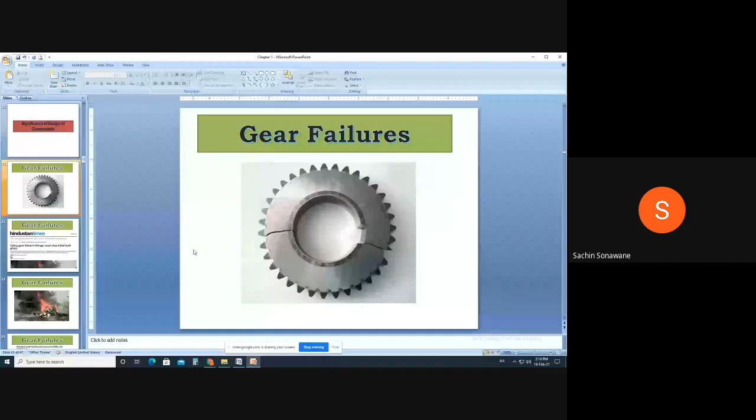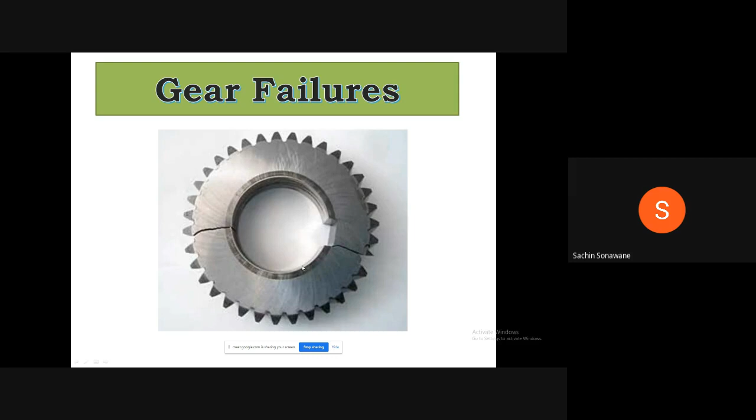There may be different causes of this gear failure. There may be improper material distribution, or improper material selection, or the thickness of the gear provided may be less as compared to the standard one. Therefore, these are the different causes of gear failure.

Now next, this is the article which was published in Hindustan Times. The title of the article is Safety Gear Failed in Mirage Crash that Killed Both Pilots. You are knowing that aeroplanes are there. These are fighter jets, Mirage, Tejas. These are the fighter aircrafts.

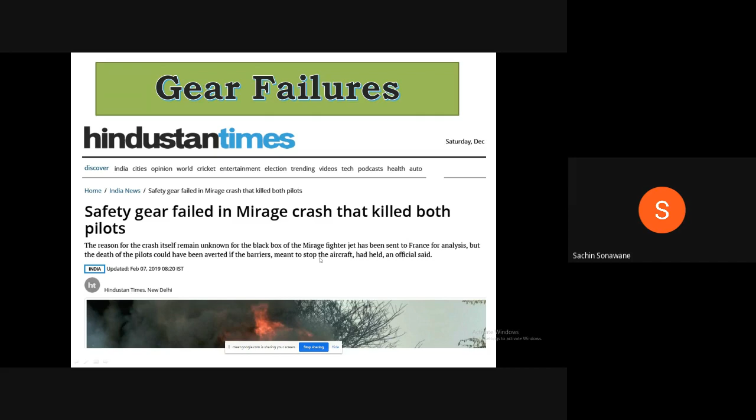Therefore, in these aircrafts, a gearbox is present. Sometimes, if the safety gear fails, the aircraft collapses, and because of that these pilots are also killed, and the aeroplane is also crashed. Therefore, this is nothing but the importance of design. Now you are observing this crashing of a fighter aircraft. Then next,

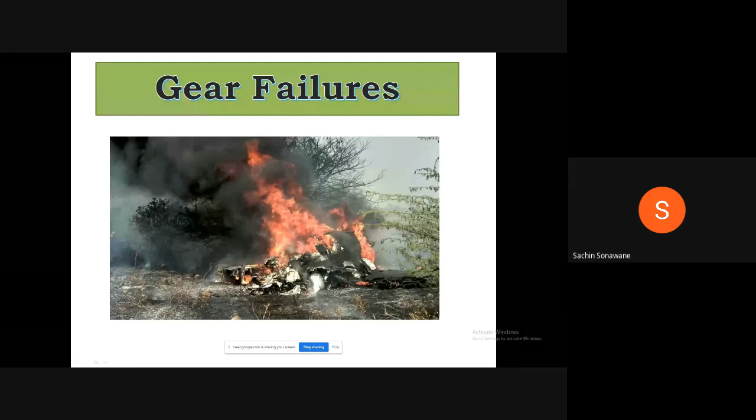gearbox failure caused fatal 2016 crash. Now this article is there because of gear failure. What is going to happen? This article was published in Copenhagen, Denmark. Fatigue fracture of the main rotor of the gearbox caused an Airbus helicopter to crash off Western Norway in 2016, killing all 13 people on board, Norway's Accident Investigation Board said Thursday.

Means because of this failure of the gearbox, the Airbus helicopter crashed, and because of this all 13 people on board lost their lives. Therefore, this is nothing but the importance of design, or significance of proper design.

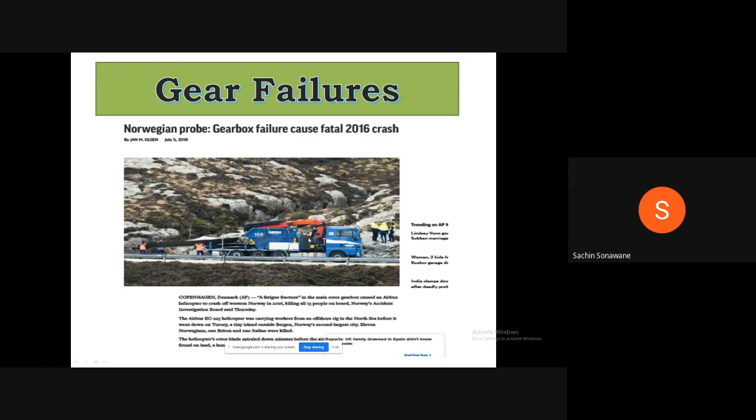Now next, pressure vessel failure. Now, what is meant by a pressure vessel? You are knowing the gas tankers we observe on the road. Gas tanker, petrol tanker, diesel tanker, then milk tanker, water tanker.

Also, while going to Solapur, in Pakni, you are observing that various types of vessels are there. Hindustan Petroleum or Bharat Petroleum, that station is there where petrol and diesel is filled in the tanker. While traveling on the road, you observe very big vessels in Pakni. Those vessels are nothing but pressure vessels. Why is it called a pressure vessel?

Because the fluid, fluid means liquid and gas, is filled in the tanks under pressure. Inside that tank some pressure is there, which may be less or greater than the atmospheric pressure. Since the fluid is filled in the vessel under pressure, that vessel is called a pressure vessel. Now, a boiler is also one type of pressure vessel.

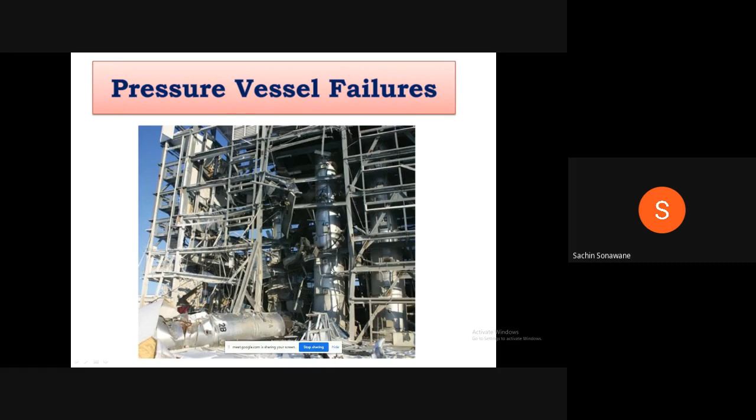You are observing in this figure that there is a failure of the pressure vessel. See, this pressure vessel has failed. There are different causes of pressure vessel failure, same as here, like improper material selection. Also, in a pressure vessel, mainly welding is used to connect different plates or sheet metal to each other. Therefore, if failure of that welding takes place, definitely failure of the pressure vessel will take place.

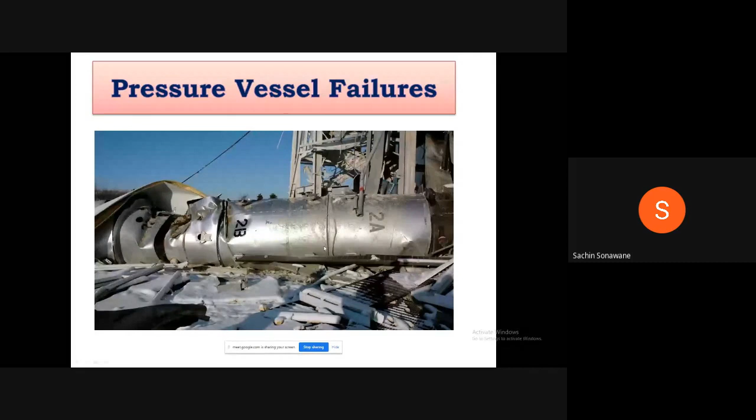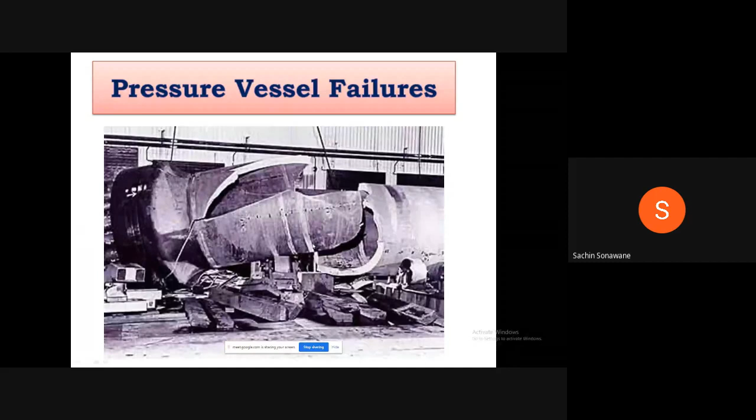See, this is the enlarged view. This is the failure of the pressure vessel. Same case is here. This is the failure of the pressure vessel. Therefore, what is the importance of design? Why is design important? If we design properly, the life of the component will get increased, and we have to take into account safety measures also.

Now, before starting the first chapter, again I will tell, there is one point in machine design which we have studied, that is nothing but factor of safety. Depending upon that factor of safety, the life of the component is either increased or decreased. Now, you may be knowing that you are sitting on the bench, and that bench plywood is having some thickness.

Suppose 10 thickness plywood will be used, and 3 students will sit on the bench. That bench will carry the load of 3 students. If I suppose we decrease the plywood thickness to 5, what will happen? Suppose 3 students of 60 kg each sit, therefore 180 kg total load will be on that plywood, and that plywood will fail.

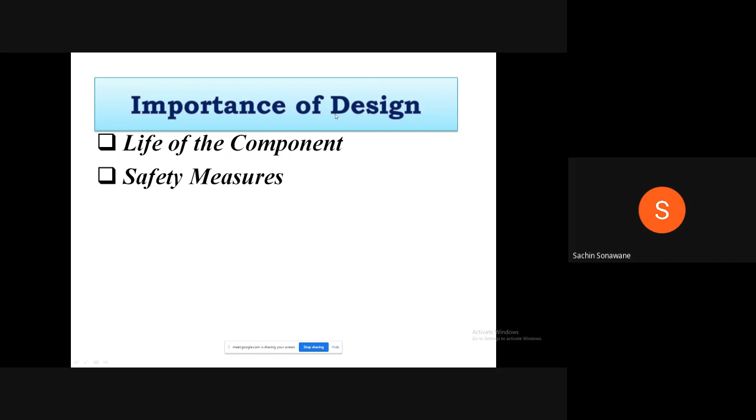Now we will start our chapter number 1, or unit number 1: spur and helical gears. First of all, we will see spur gear. Its contents are design considerations of gears, gear materials, types of gear tooth failures, hunting tooth, gear tooth loads, minimum number of teeth, face width, Lewis equation, Spott's equation, Buckingham's equation, gear design for maximum power transmission, introduction to AGMA code.

And helical gear, virtual number of teeth, force analysis, beam and wear strength, effective load on gear tooth. Therefore, this is the syllabus of the first chapter.

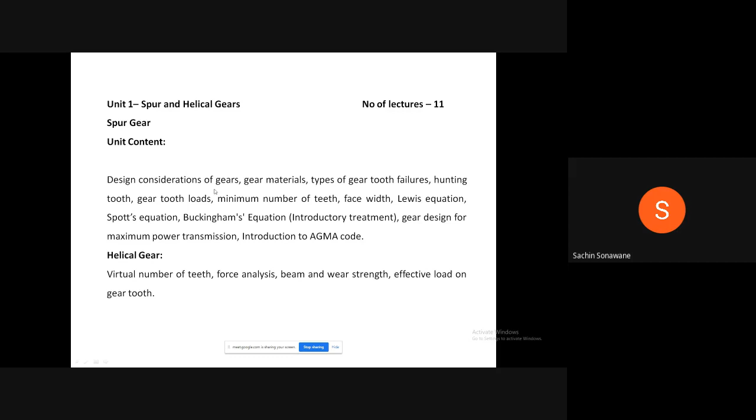Now, I will not directly start with design considerations of gears. First of all, we will see some preliminary theory of gears: what is meant by gear, what are its advantages, limitations, and types of gears. Then we will see some gear terminology, because this is not covered in any chapter or syllabus you have studied so far. Therefore, first I will take some introductory part, and then you will understand the future topics. So, first chapter, spur gear, or first point: spur gear.

Now you are observing these diagrams. This is the spur gear, and this diagram shows two spur gears in mesh externally. Here external contact is there, and that's why we can say that these two gears are meshing externally.

Now, how are you identifying the gear, or what is the definition of gear? Whatever figure you are observing, if anyone sees this figure, he will say that this is the gear. And if a mechanical engineer sees it, he will say this is the spur gear. So how do you identify the gear, or what is its definition? Now, all are saying that gears are used to transmit power. Yes, it is correct, but this is not the definition of gear.

The definition of gear is: if teeth are provided on the circumference of a disc to transmit motion and power, then it is known as gear. Meaning, how do you identify the gear? If there will be teeth on the periphery of the disc, then it is known as gear.

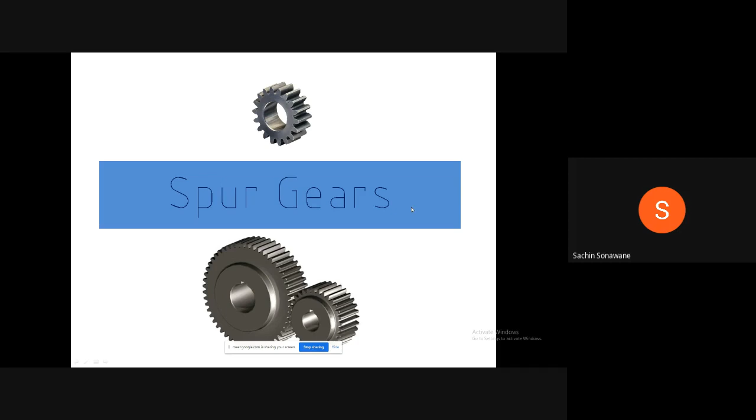Now, introduction. Again, that definition of gear is there. Any toothed member designed to transmit motion to another one or receive motion from it by means of successively engaging tooth is called a gear or toothed gear. Generally, we say gear only, not tooth to the gear, because if gear is there, then there will be teeth on the periphery of the disc. Therefore, a gear is a toothed wheel with teeth cut on the periphery of a cylinder

or a cone. Teeth of one gear meshes with teeth of the other gear. Hence, it is called a mesh drive or positive drive. Why is it called positive drive? Because there is no friction or power loss. Whatever exact velocity ratio is transferred from one shaft to another shaft, that's why it is known as positive drive.

There is no slipping phenomenon. You know that in case of belt drive, creep and slip phenomenon is there, but that does not exist in case of gear drive. That's why gear drive is known as positive drive, because there is no loss of power or motion due to friction. It is preferred when medium or larger power is to be transmitted. Rotation of one gear will cause rotation of the other in the opposite direction.

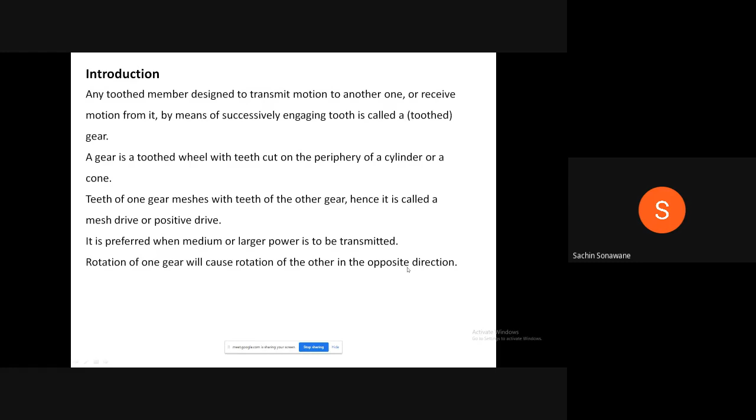Now, what are the advantages of gears? Gears offer the following advantages. First, compact drive on account of small center distance. Second, high efficiency, reliable service, and simple operation. Third, positive drive due to negligible slip between contacting surfaces. Fourth, gives higher speed ratio and can transmit higher power. Fifth, it is possible to transmit power between parallel, non-parallel, intersecting and non-intersecting shafts. Sixth, power can be transmitted at higher speeds.

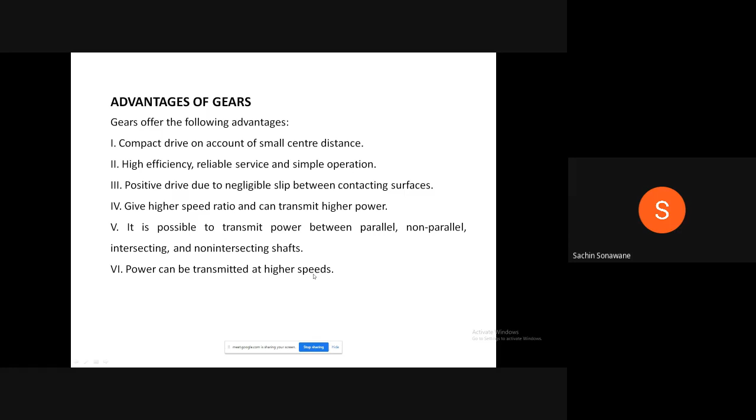Now, limitations of gears. First, the error in tooth meshing may cause undesirable vibrations and noise during operation. Second, costlier than belts and chain drive, because manufacturing of the gear requires special machines and tools which are costly. Third, power cannot be transmitted over long distances. Fourth, precise alignment of shafts is required. Fifth, requires continuous lubrication.

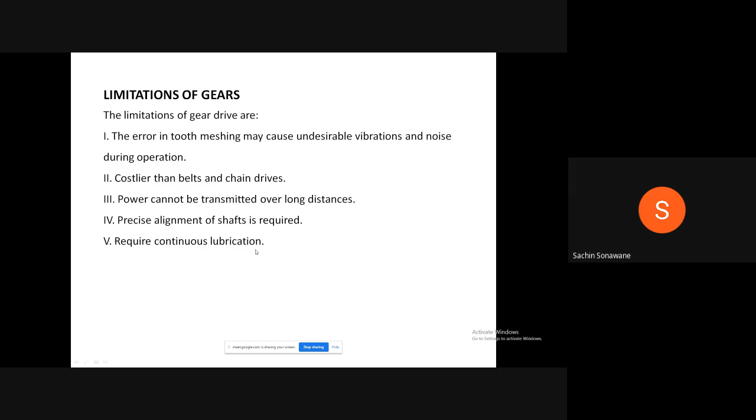Applications of gears. The gear drive has wide applications in the following fields. First, metal cutting machine tools - that is, you may have seen gears in lathe machine, milling machine, shaping machine, in planing machine. Whatever machine tools are there, or in case of drilling machine also, you will find gears. Second, automobiles - our two-wheelers, four-wheelers. In case of four-wheeler, trucks are there, then aircraft, helicopter. Everywhere you will find gear drive is there.

Then tractors. Fourth, hoisting and transporting machinery, that is material handling equipments. In case of material handling equipments, worm and worm gear drive is used because it has high speed reduction. Then rolling mills, then marine engines - that is, in case of ship also, gear drive is used.

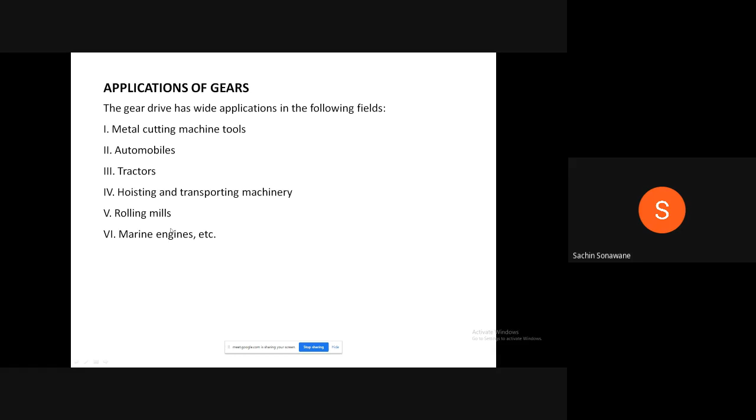Then next, classification of gears. Now gears are classified according to how they transmit power between the two shafts. First is parallel shafts. In case of parallel shafts, gears are classified as spur gear, helical gear, double helical gear, and herringbone gear. Double helical gear is also known as herringbone gear.

Then gears can be used to transmit motion and power between two intersecting shafts. In that, four gears are there: straight bevel gear, spiral bevel gear, Zerol bevel gear, and face gears. These all four types are of bevel gears. Bevel gears are used to transmit motion and power between two intersecting shafts.

Then non-parallel, non-intersecting shafts. In that, spiral gears, hypoid gears, and worm gears. Therefore, this is the overall classification of gears. Again, there are two types of classifications according to the position of teeth.

That is, if teeth are parallel to the axis, it is known as spur gear. If the teeth are inclined with respect to the axis, then it is known as helical gear. If the teeth are of spiral shape, it is also known as spiral gear.

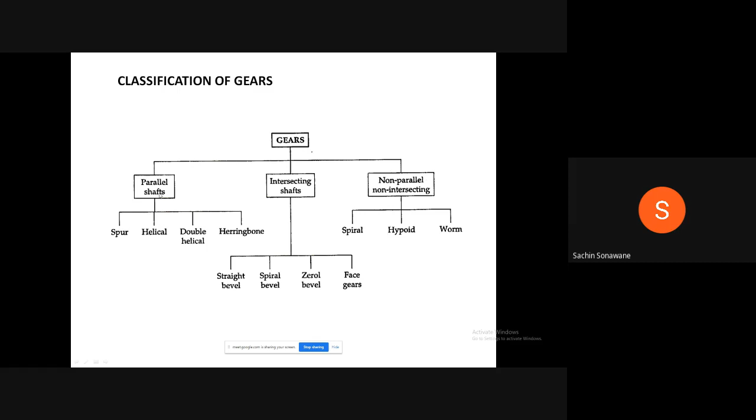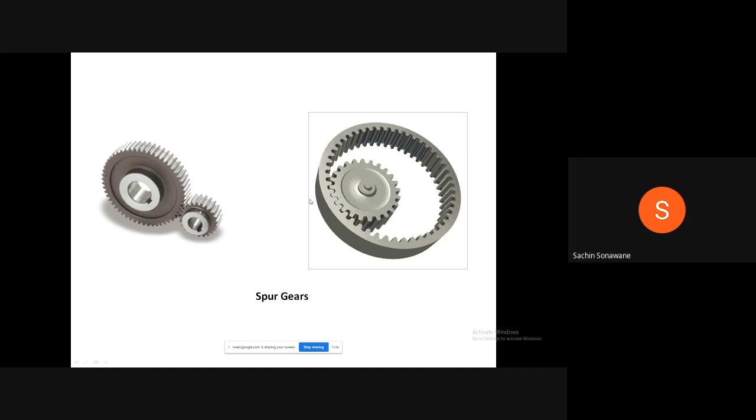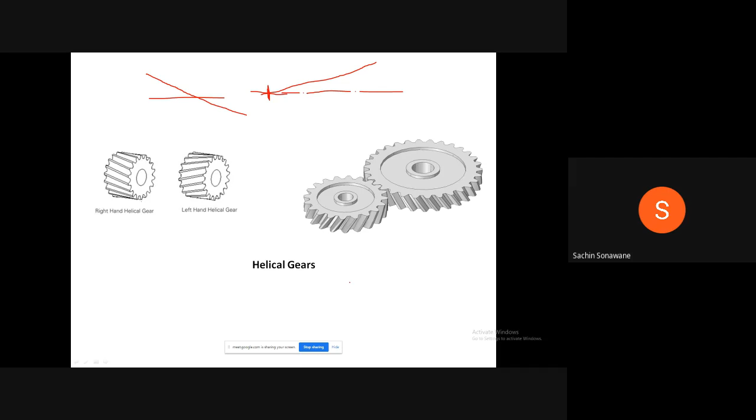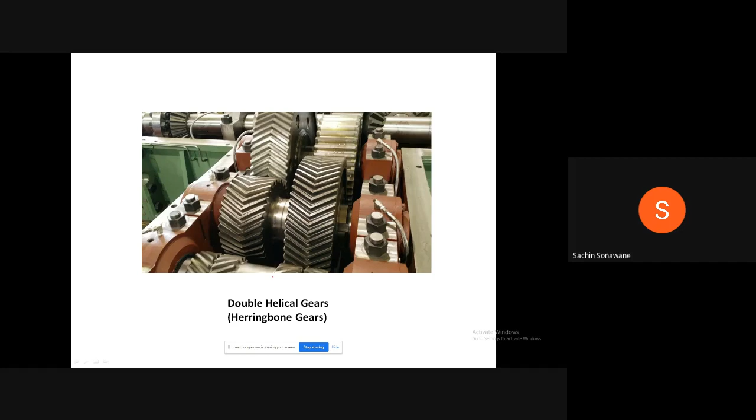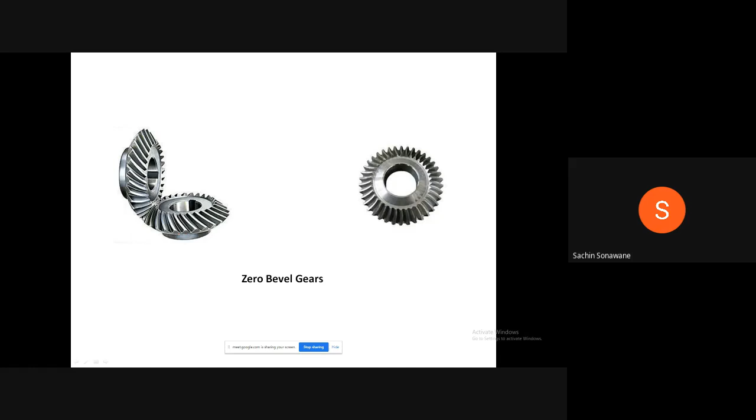Now, this is zero bevel gear. I have shown here separately. Zero bevel gear. If you see, teeth are not straight, but they are not spiral shape also. That's why they are known as zero bevel gear. What is the use of zero bevel gear? When I teach the bevel gear chapter, at that time again I will explain what is meant by straight bevel gear, spiral bevel gear, and zero bevel gears.

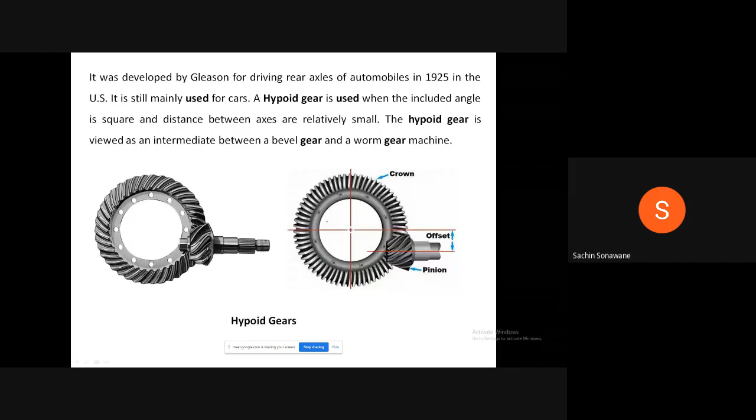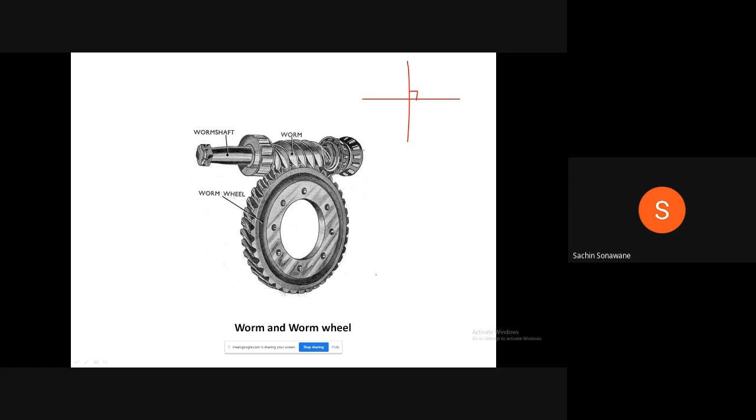Means worm and worm wheel are used to transmit motion and power when the two axes are perpendicular to each other, when the axes of the two gears are perpendicular to each other and they are not intersecting. Axes are not intersecting, but axes are perpendicular to each other. At that time, you can use worm and worm wheel.

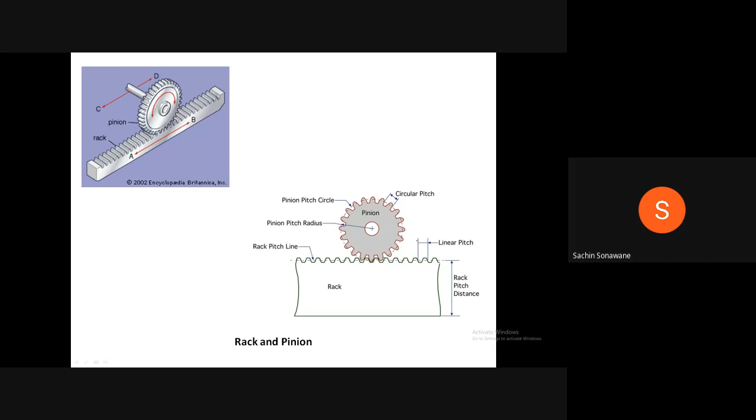Why is this known as circular pitch? Because if you connect these two points, this point and this point, it will look like an arc. The arc is nothing but one part of the circle, and that's why this pitch is known as circular pitch. This distance is a linear distance, that's why this pitch is known as linear pitch. Therefore, this is nothing but rack and pinion.